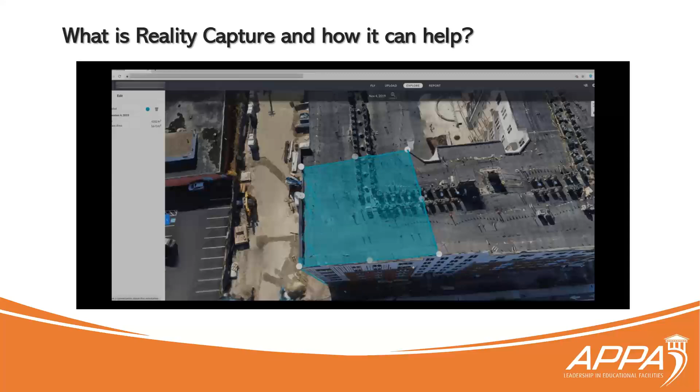So let's discover what reality capture is. Reality capture is a hardware and software solution that allows you to create 3D point cloud models or 3D meshes from laser scans and photographs, which translates to a virtual 3D model of your project or scope of work. Point clouds are made up of billions of 3D points that a LiDAR scanner captures, and 3D meshes are made from overlapping photos that a digital camera captures. After your model is created, you can virtually revisit your project anytime. Just think about the value that could bring to your design and construction teams.

We use this data for all types of analysis, for example, measuring distance, area and volume, floor flatness and levelness, wall, floor, pipe slope, surface elevations, and more.

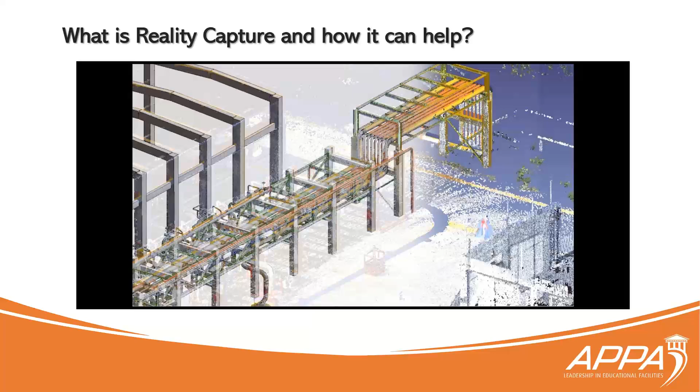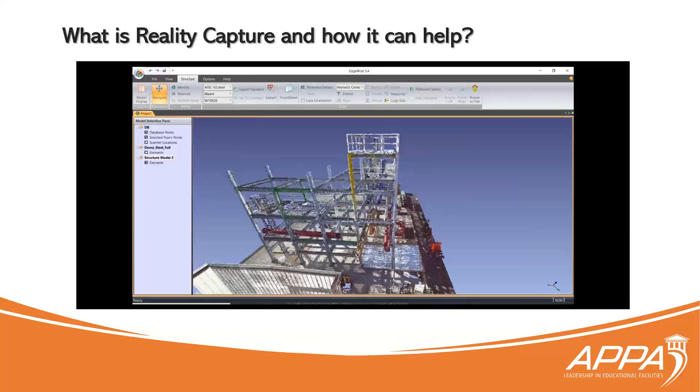You can also use this data for feature extraction, which is automatically or semi-automatically extracting usable 3D geometry or 2D lines from point cloud models to jumpstart your design. For example, you could extract walls, floors, duct, pipe, conduit, structural components, ground topographic surfaces, lane, curb, and rail lines, etc. Then consume that data in your design authoring tools.

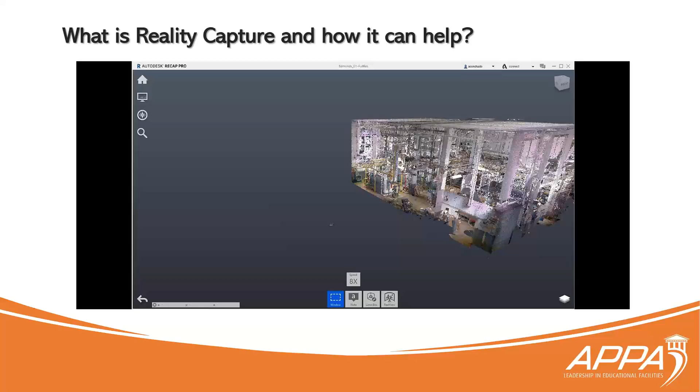These 3D models and meshes can also be linked into BIM, CAD, and GIS software, such as Revit, AutoCAD, Civil 3D, InfraWorks, Navisworks, Bentley applications, ArcGIS, and more, then used to generate highly accurate BIM and CAD as-built models. You can utilize this data for all phases of a project lifecycle, including existing conditions, concept design, design development, construction, handover, and commissioning.

So I want to review some examples of industry standard reality capture equipment, many of which we utilize here at Fleming. The first category we'll look at is static LiDAR terrestrial land-based scanners, meaning you initiate a scan, reposition the scanner, complete the scan, and so forth.

This category of scanners produce highly accurate and dense point cloud models by stitching together scans that can also be geolocated. There are a wide range of costs, starting at around $15,000 for economical scanners, upwards of costs of $100,000 for high quality scanners. They average 2 to 8 millimeter accuracy, depending on scanner models, settings, and overlap between scans, and could typically take 1 to 6 minutes per scan, depending on density, picture quality, and hardware you're using.

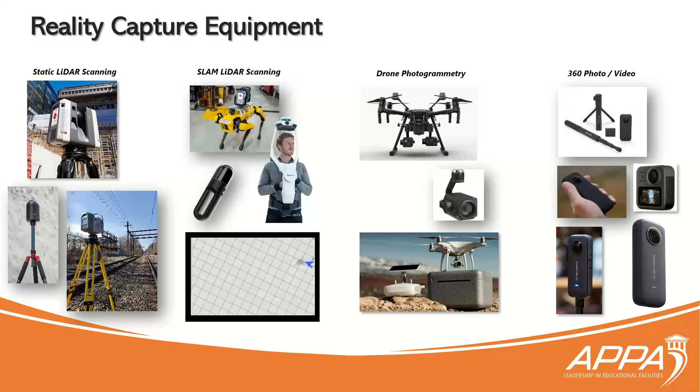They can be handheld, mounted on a pole, tripod, vehicle, helmet, drone, virtually anything. Cost average at about $350 to $1,000 for good high-quality cameras. They're also commonly used in action sports. It's a fast data capture process, photos take a split second to take. Depending on the software, you can automate or manually map photos and videos to plans, which can even be geolocated. We'll cover that integration to the project workflow later on.

So how is this technology changing the way we work? And how can this help you in the current and post-pandemic climate? Not just our industry, the entire world has experienced a massive shift to the cloud with the need for easy access to data anytime, anywhere, any device.

We're utilizing this technology for almost all aspects of design, using different applications to work and collaborate in various cloud platforms. Along with this shift, the AEC industry is experiencing a transition towards a common data environment, meaning regardless of the location, tool, or file format, design and construction teams collaborate on project data within the same unified platforms, using various applications, tools, and processes.

There's so much value with all stakeholders in a project being able to access and utilize the I in BIM, which is information that we're inputting into our designs. To summarize, there's endless value by utilizing reality capture and BIM workflows for your designs. We're using this technology for more comprehensive project capture to build smarter designs and solve challenges during design, not construction, which is resulting in a more coordinated and efficient design, construction, and turnover process.

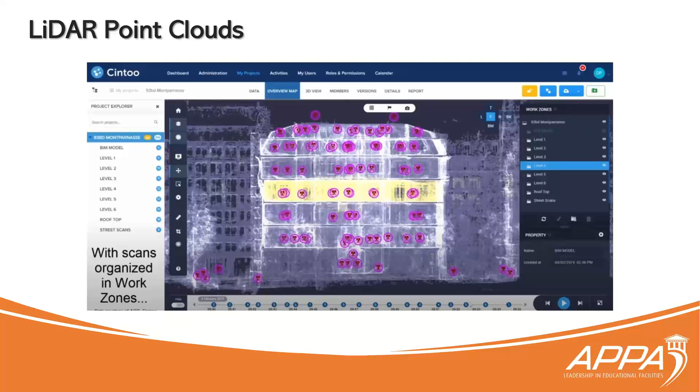You can organize your point cloud in work zones, which simply means grouping scans for quick and recurring access to specific areas. This is by level, which is typical, and you can quickly jump into each work zone from there. Here's an example of a point cloud organized into work zones via floor level and area.

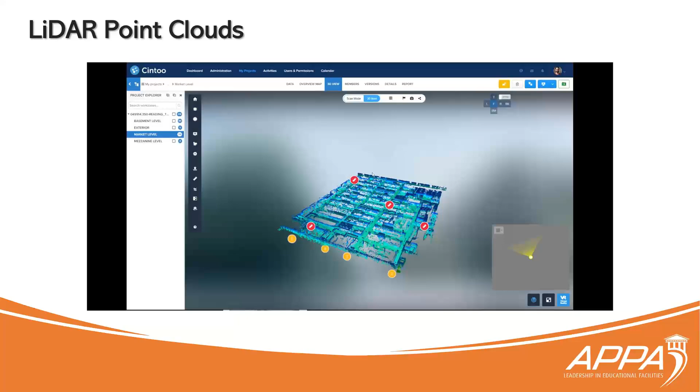Notice the notes and dimensions available. We can jump right into a crop view that someone had saved with certain settings set, and from here we can jump into a scan setup and switch the way points are displayed very easily.

We can switch from the surface view to a panoramic photo that was captured during the scan. You can also dimension and annotate in any display mode and save those dimensions.

You could easily create and save cropped areas of the point cloud, create annotations, dimensions, upload other supporting documents, and download point cloud models. You can upload photos, videos, PDFs, other images, etc.

Measuring is one of the most common tools used when interacting with reality capture data, and Cintoo has a really nice measurement tool where you can pin one side of your measurement and quickly measure anything off that object.

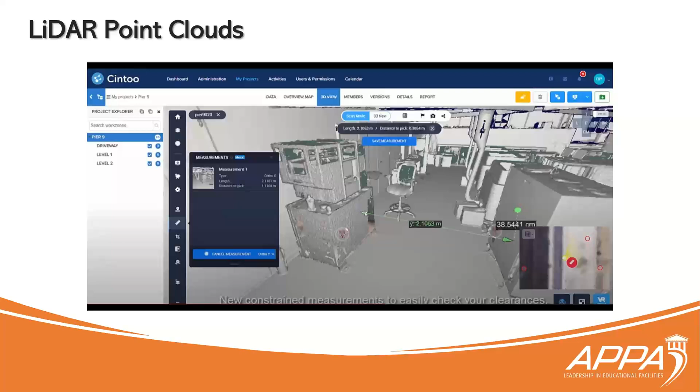Cintoo is built from a collaborative mindset, so all of these crops, annotations, markups, edits, and uploads that you make are saved and available to the entire project team. You can run visual analysis and BIM point cloud model comparisons to confirm accuracy.

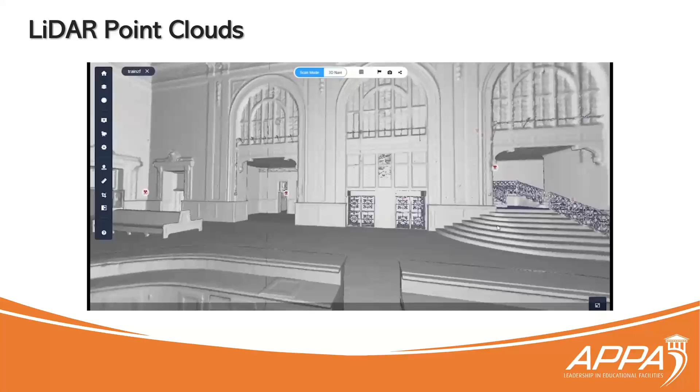There are other products and processes available to share reality capture data that we utilize as well. But Cintoo's been a great tool and process improvement for all stakeholders involved so far due to its user-friendly controls and ease of sharing and integration with other apps.

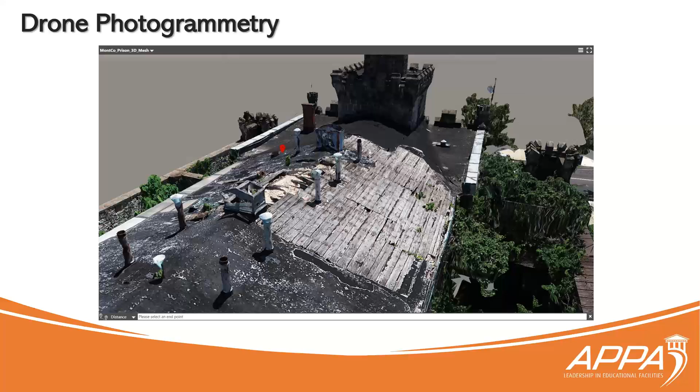Next up is photogrammetry, which could be the output from a drone or handheld camera. We're viewing a web-based solution, but this could also be utilized with installed software with more tools available for analyses and feature extractions. We can easily take measurements and notes with a solution like this.

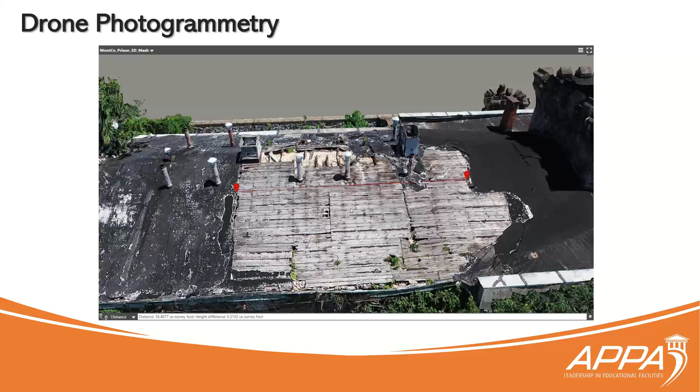In other apps, we could combine LiDAR data with these 3D meshes and also convert these 3D meshes to point cloud models to complete feature extractions, and also link these into various design authoring applications, very similar to LiDAR, for as-built modeling and more.

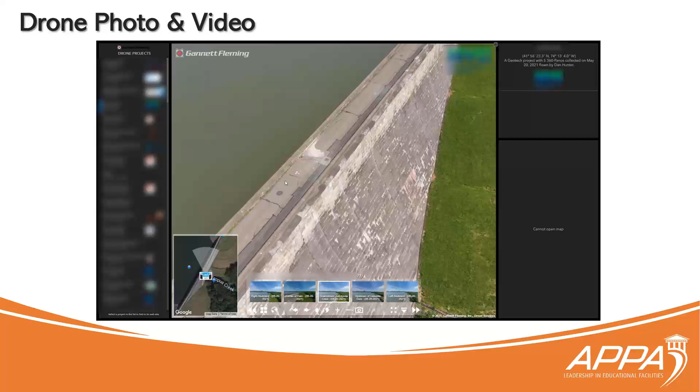Here's an example of a high-resolution 360-degree camera mounted on a drone. Just like sharing LiDAR and photogrammetry models, this data can be shared via secure web access in the cloud, with no software or hardware required.

These high-res cameras mounted on drones capture an enormous field of view and detail from hundreds of feet in the air. You can navigate the key plan in the lower left-hand corner, which tracks your viewing perspective, or by selecting photos in the lower ribbon.

Depending on the team's goals and objectives, we develop various deliverables with this drone and photo video data. We could integrate 360 photos and a sitemap viewer like we're seeing here. We could set up a video inspection with sitemaps.

Video and high-res photo inspections broken into zones or sections depending on what you're capturing, or all of the above and more. Being able to easily document a scope of work with this level of detail and ease of use, then share it with all project stakeholders in this capacity, just like LiDAR and photogrammetry, has been invaluable to our project teams and is enhancing the quality of our projects and designs.

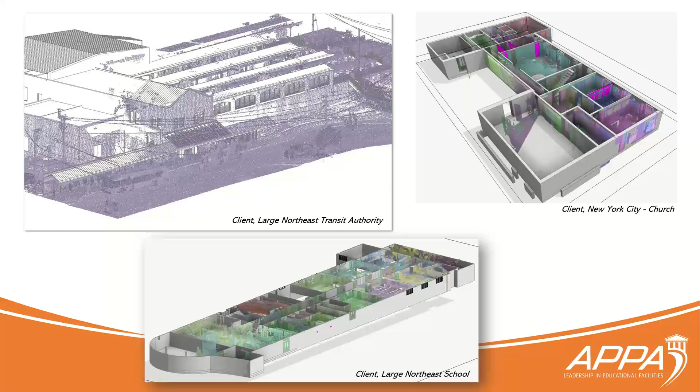We need skilled, motivated subject matter experts to take ownership, drive change within your organization, evaluate new enhancements and inventive solutions, and be those experts other teams can rely on for projects and proposals. We need processes to effectively train various level employees on the myriad of technologies available, how it can help their teams, and what they can do with this technology.

And finally, continue to develop new workflows, processes, and standards to enhance efficient, effective use of reality capture on projects. And now we get to technology. There are so many hardware and software solutions that we utilize currently, and way more that exist.

It's not just the reality capture hardware. It's the high-end PCs processing this data, servers and external drives storing data, using cloud services to store and share data various ways, using different software solutions to consume data effectively and process data various ways depending on how you're utilizing reality capture.

Now that we have a good understanding of what reality capture is, I'm going to hand this off to Bill, who's going to review how it's applied to all phases of design and construction.

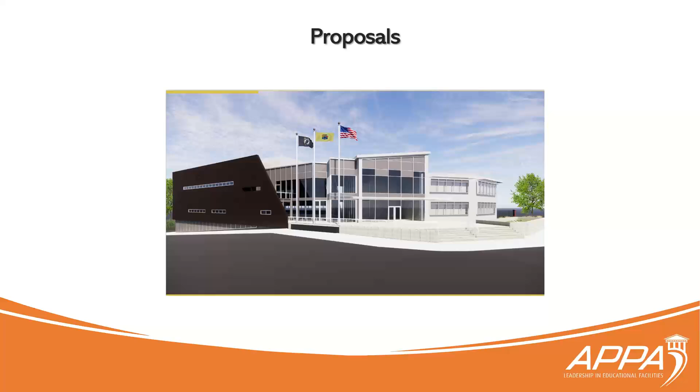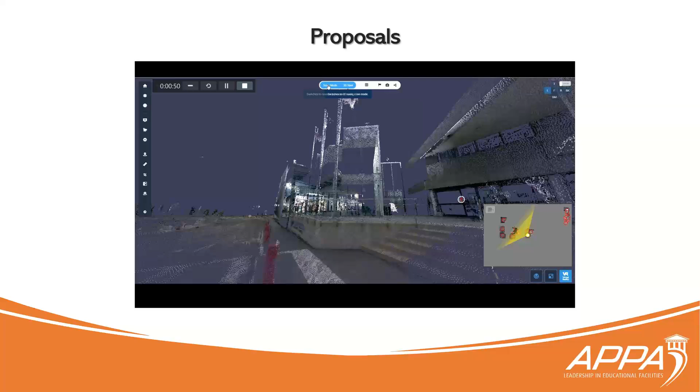These scans help get an accurate picture of the tie-in points and dimensions of the existing structure. We traveled around the building to capture this information, noting that during a proposal phase, planning was important. The planning of those scans leveraged the time spent and the information necessary for that. You can denote and change the model features to help capture and understand the elements that were scanned and see within that point cloud.

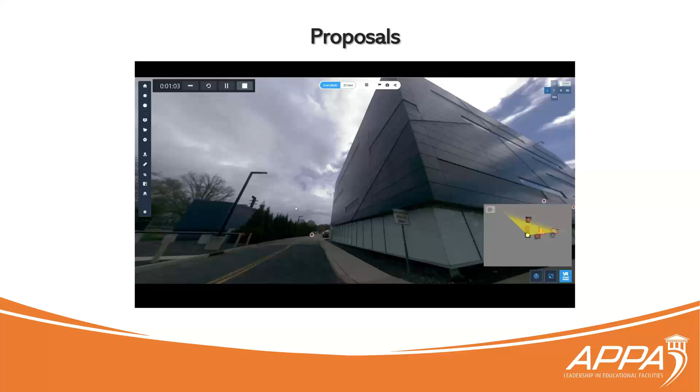You'll see the picture-in-picture view in the bottom right shows the scans. These are large and widely spaced around, and that's on purpose because at a proposal phase you weigh what information you need, not to shortchange it, but the amount of time spent, that project's not won. So you have to weigh that with the decision process.

To the left there, that's the demolished part, and it's important that we capture that information. You'll see we jump between scans because this building was constructed in two phases, where the newer construction to the right was about 15 years later. However, not all utilities were independent.

There was only one main gas service. It came in at the back location of the original construction and divided into 3 pieces. One went off to an adjacent structure, one went to the original construction, and the third traveled through the original construction and ultimately to the construction that was 15 years later. The problem is we were demolishing the original construction, and this LiDAR helped us get accurate information of that gas line and its path through the structure to make sure that handshake was as seamless as possible.

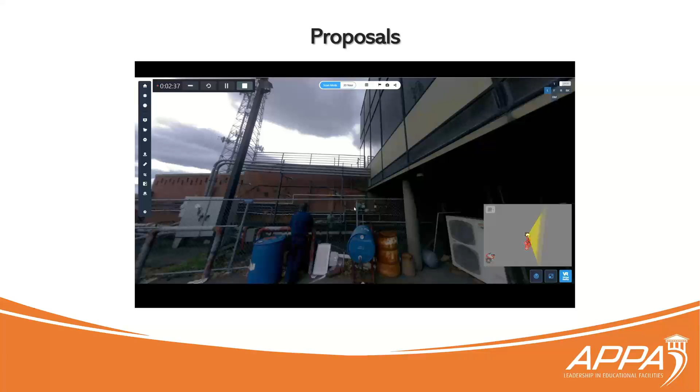So going forward, we'll see the other proposals, pictures, and renderings that were done with this project.

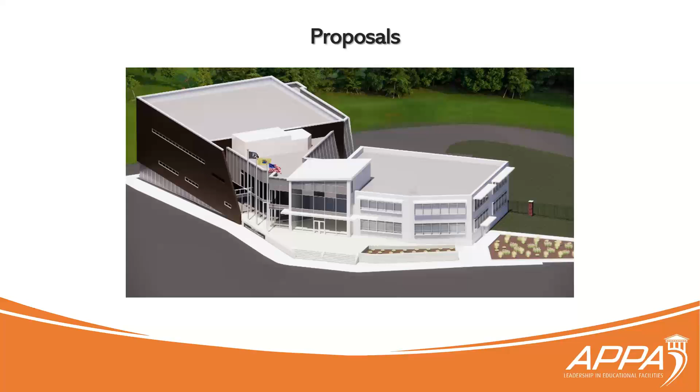Here is a rendering, this is the front view. Mid-picture is that handshake of the existing structure, which was phase 2 of construction, about 15 years after the original construction that's going to be demolished. The next rendering is a slightly different perspective. Now we're going around to this, which is all existing to remain. And finally, to the last.

So let's move into design. Within design, who benefits most from these technologies and their implementation? From our perspective, it's the design team and the client. For design, it captures more accurate survey information with fewer people and in less time. The information helps construct a virtual representation of the project for continued assessment well after the project team leaves the site. As for items that are designed, we can also do virtual clash detection and interference checks in 3-dimensional space before construction occurs.

Now for the client, it also limits disruption. It limits the personnel on site and visually helps relay design approach and intent. If a new project personnel on the client side is added, they can get up to speed quickly because they can understand the site conditions without physically walking and visiting it again together. It enhances facilities personnel interaction and engagement to identify exact tie-ins with a visual support representation to ensure all project team members are aligned.

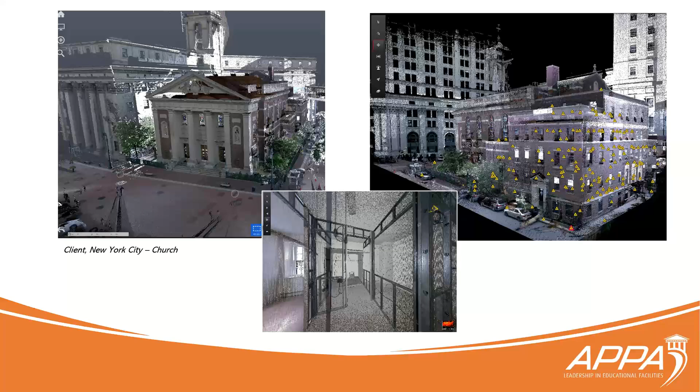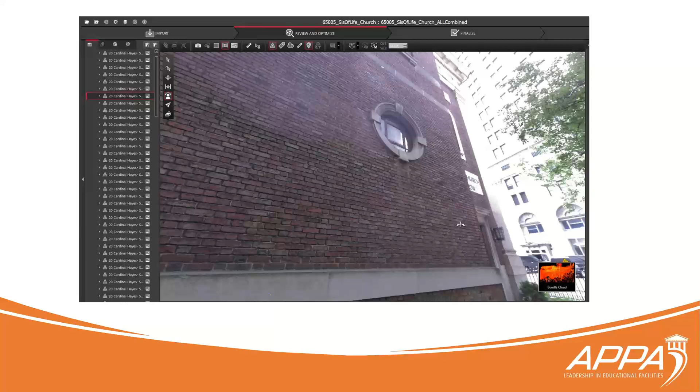So let's navigate the scan. We'll first make all scan locations visible. By utilizing the 360-degree image capturing during the scan, right away we see drainage along the building face that's resulted in efflorescence of minerals on the surface of the brick. This architectural team scanned and surveyed the facility, then linked the point cloud into Revit, and from there they modeled the entire structure, which included the church and the attached rectory.

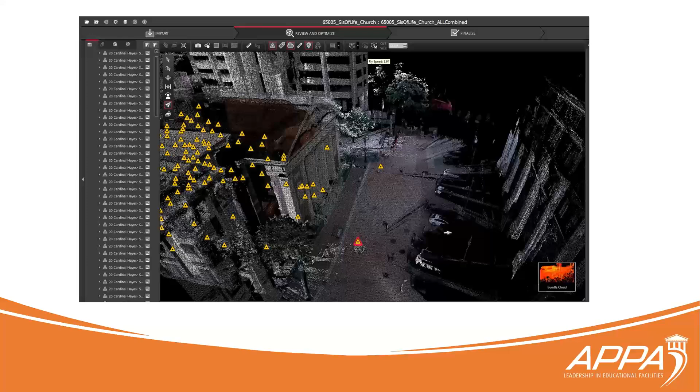The scope of this project involved modifications to the rectory, with an adjoining space that could house nearly 20 people and provide offices for each member of the mission. To do this, the facility needed to add an elevator and new ramp to comply with ADA. Lastly, envelope items were addressed, which included repointing the existing facades.

Regardless of the software you're using, icons for each scan location are shown, allowing you to easily navigate through the point cloud while giving proper perspective of where the scan occurred.

Sorry, my light went off.

This video will navigate from the large congregation areas, as you see here, into the back of house and support areas, to understand the complexity of this facility, where the upper floors were in various stages of demolition and reconstruction.

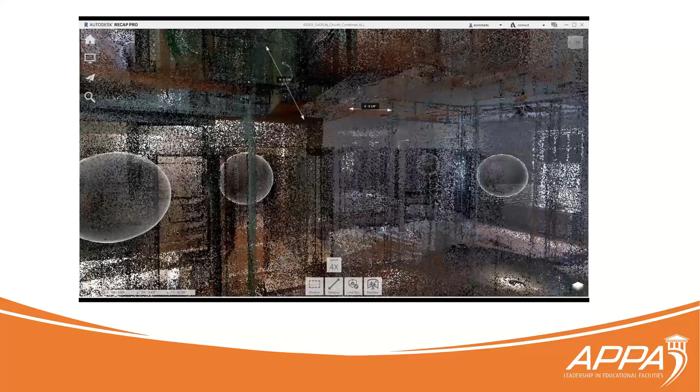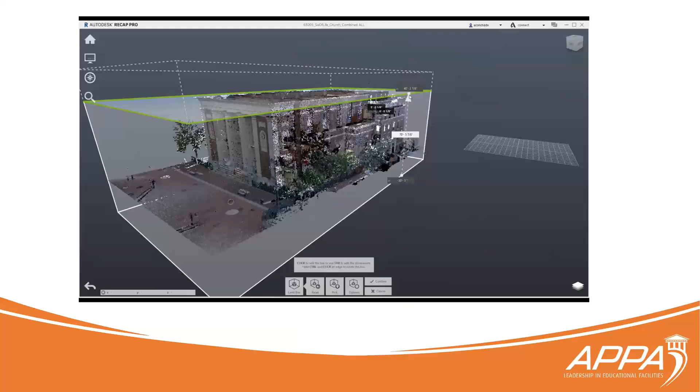Now, within the back of house areas, we're faced with small compact rooms. Here, you'll see the density of those scans shown by all the dots. We had to get within each space to allow the line of sight and get appropriate information for the LiDAR scanning.

Now, this project, our client was a congregational staff that expressed concern about visualizing the whole picture. So to help navigate it, we showed the digital twin of the building. We were able to step outside the building and start to slice it up.

We showed the levels, jumped to a level, and explained the process and the work happening within each space. Further detailing of site dimensions and annotation, as Tony pointed out earlier, can be put within the model and shared to help that collaborative discussion that occurs. So stepping further outside the building, you see all the information that was captured.

So here's another example. This project was a boiler replacement in a central mechanical room. However, we had to capture more information than just that room. Here's an unedited scan, and the reason I'm saying unedited, you'll see off to the side some of those points that are outside the building envelope.

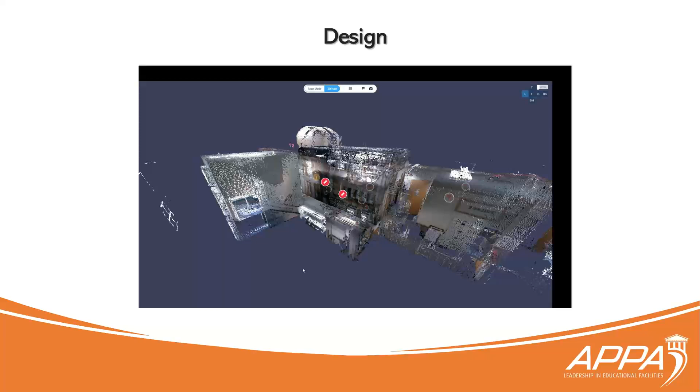Now, this is a line of sight technology, and with that, if you have a window or a transparent surface, it will go through, which can be edited later, but you'll see points outside your envelope. This scan will navigate through all of the spaces, and off to the side are those points captured outside. Now we navigate through each space, and what was captured here is to get a background. The reason to get the background outside of just the space involved is because code requires carbon monoxide detectors.

And this client didn't have that background. To do this by hand would have taken an exhaustive effort, where we're able to do it with scans. We walk through the space, appropriately space the scanner to get the accurate information of the outline and necessary background at play, to get all the information in a streamlined and effective process.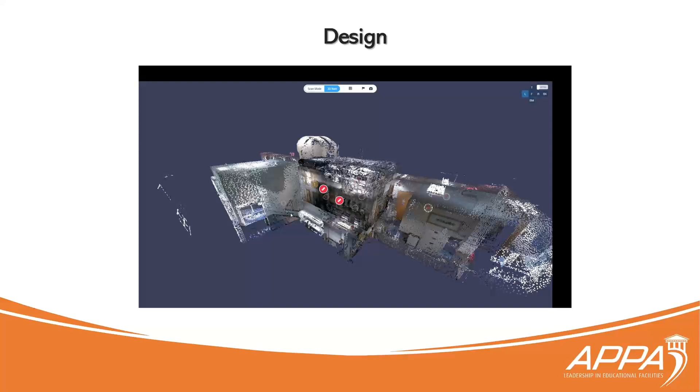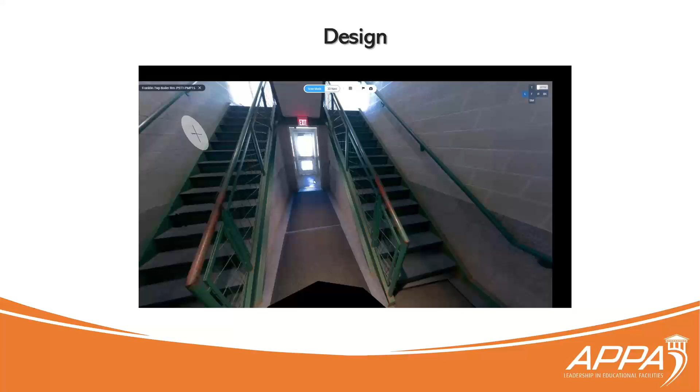So from there, the end product, we navigate into the scan, and here's in that hallway. Now you'll see that window was showing where points were exterior to the building. Again, with the unedited model.

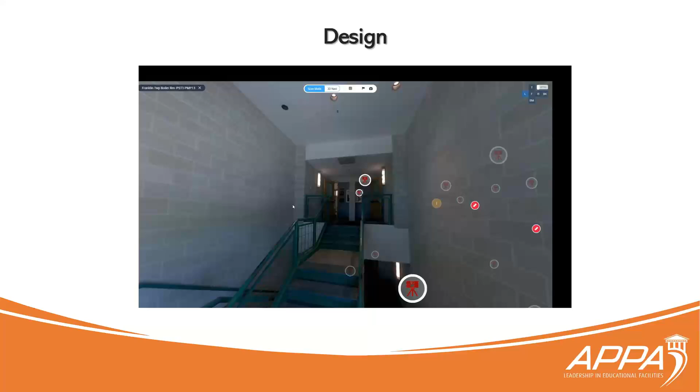You can jump point to point. Here, you'll see the orbs with the camera icon, and as we walk through, you'll see the density changes. For the architectural, it wasn't a higher density, but when we jump into the mechanical room, it's a much tighter density.

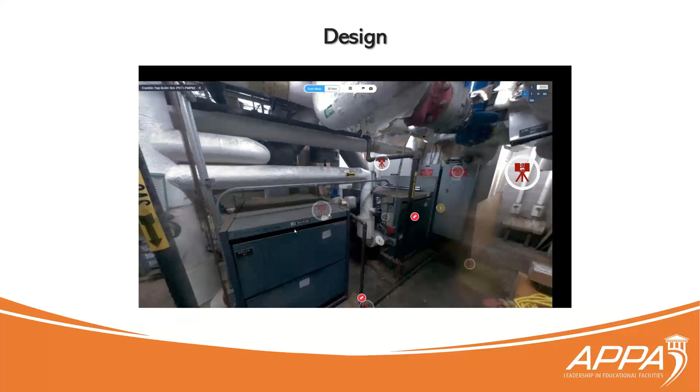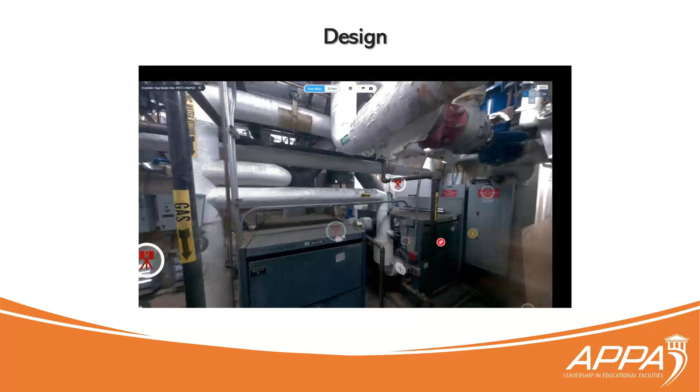Now, this is a congested space. Scans were taken at different elevations, high and low, around equipment to make sure that we have the line of sight information necessary to help facilitate design.

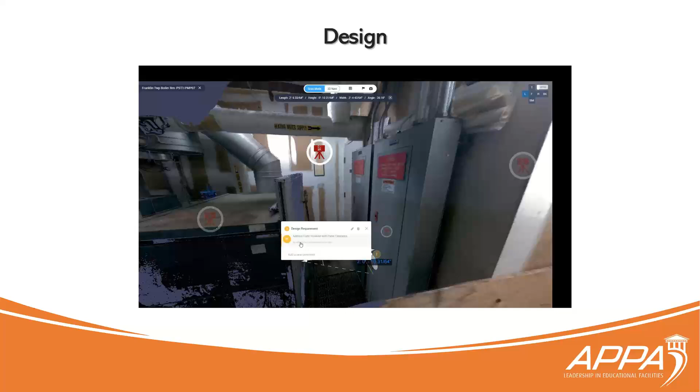And with that design, we share information amongst the design team. Here, a dimension was noted, and within that dimension, there were annotations. The annotations informing them that there's currently a code violation: improve and increase the clearance to the electrical panel.

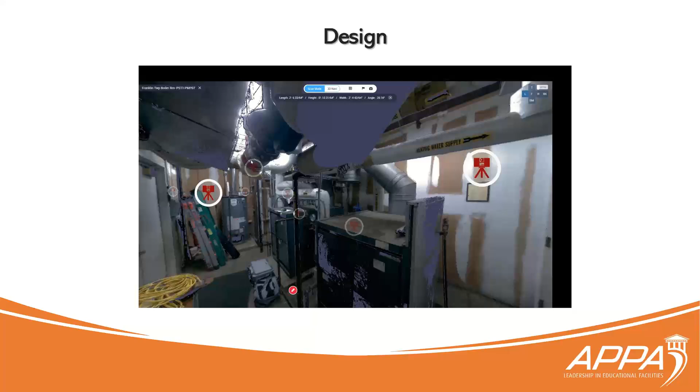This is clear information that is shared amongst the project team to make sure those design elements and necessary things are shared amongst the people that were on site, as well as the other support people that are helping with the project.

Again, the scans here are high, above the pipe rack, to get all that information that is necessary, and as well, jumping down low, getting under that piping for the line of sight, and behind equipment, and even between equipment, with this latest scan between both boilers.

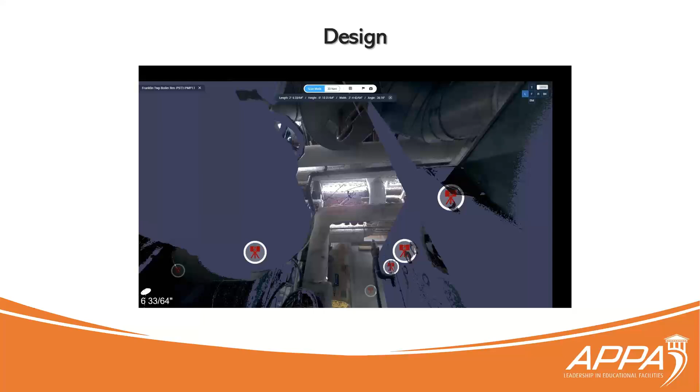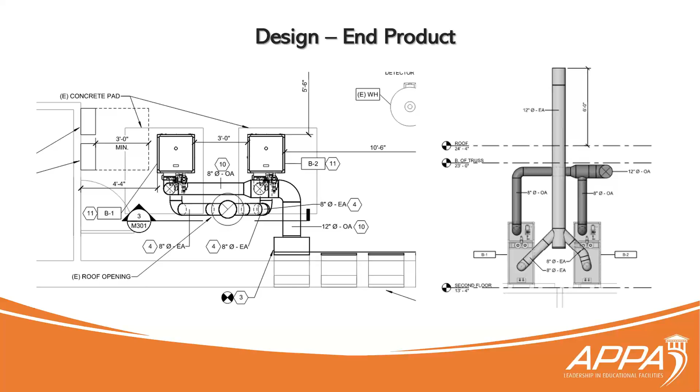So we'll move from here into what the design end product looked like. From that 3D LiDAR scan and information, we developed the model and all the information. We also can then do our Revit work on top of that, removing the equipment that is to be removed, and doing a 3D representation of all the information that then is going back into the space, as well as the equipment and associated piping and all the pertinent information.

So taking it from design into bidding, why do you do a walkthrough? We see it as limiting risk. Contractor walkthroughs allow them to see the site conditions, plan their approach to the projects, and understand the obstacles. In short, they can formulate their thoughts.

But in the current stage, how are these problematic? They're scheduling, scheduling with project managers, facility personnel, users, contractors, etc. But even after it's scheduled, there's also logistics with that site walk. You're managing a large group of people.

And finally, when bidding occurs, you want to make sure there's no competitive advantage. During a normal site walk, there is talk, there's chatter, and potentially a question is asked and may be answered where it wasn't supposed to be, and now a contractor has an advantage. By doing it virtually, everyone is in the same room, can walk through the same information, and questions can be clear, concise, and everyone can be informed of the answers.

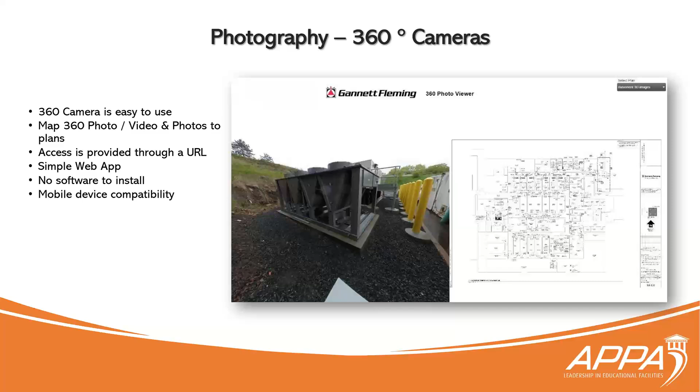So with the 360 camera, here's one example. It's a split screen where the picture's on the left and the plan is on the right. This shows the location where each picture was taken and the associated picture that they can pan and zoom and navigate through. The next example is a 360 with a similar picture-in-picture, just in a smaller corner.

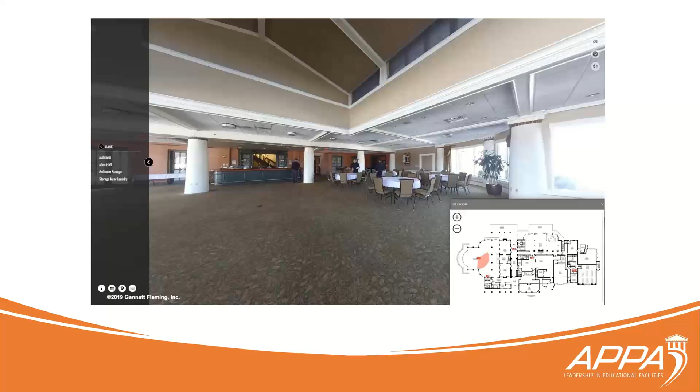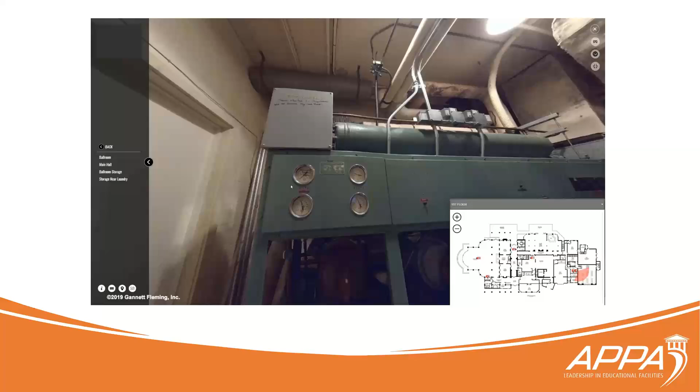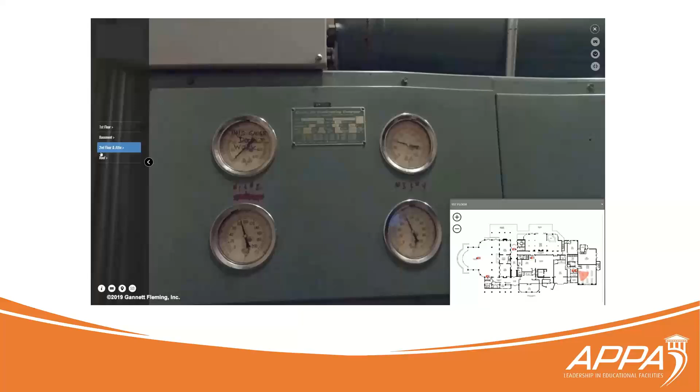That shows where the picture is done, but we also included the perspective, where our line of sight view is. The key plan allows you to jump point to point, and this entire process was to mimic that contractor walkthrough - the old traditional approach of gathering a large group of contractors with clipboards in hand, walking through your site, but without the physical site presence and the logistics.

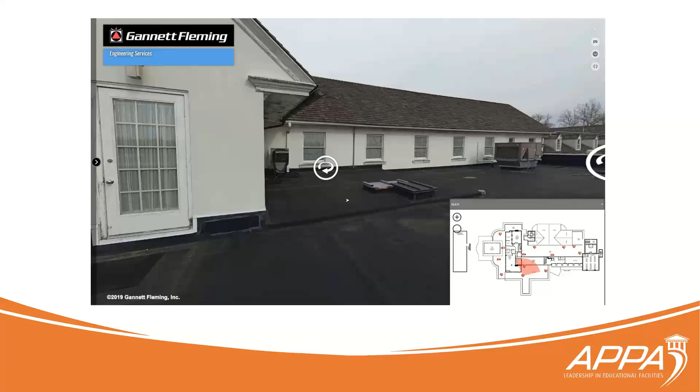Not only did the solution come from needing to support virtual walkthroughs, it came from the need to more effectively share this data with the project team.

So in this video, you'll see the key plan and icons, and we can jump to the different staging points as well as between different levels. Initially, we're on the ground floor, and through the side drop-down menu, we jumped up to the roof.

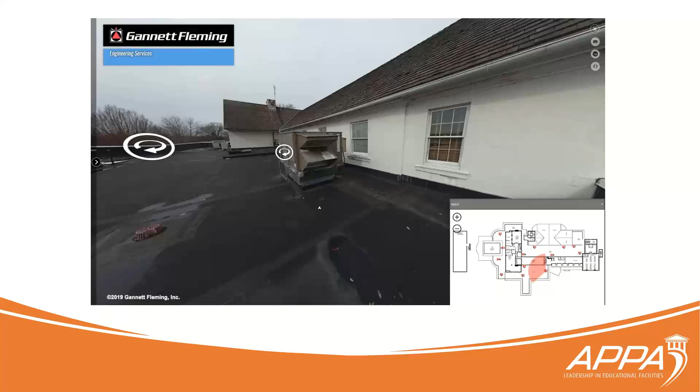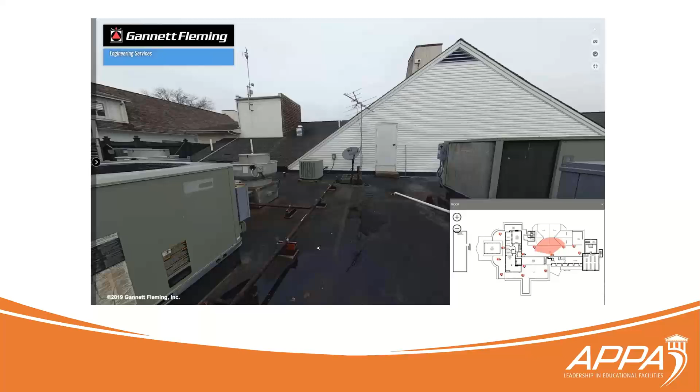All these examples are going to show you today is the project team - their survey was very planned out. It was planned out to avoid blind spots, allowing full view of site elements and equipment. Regardless of technology, the items that we're showing you here include line of sight information. The locations are selected, and for this, they correlate to the plan in the picture to give that perspective.

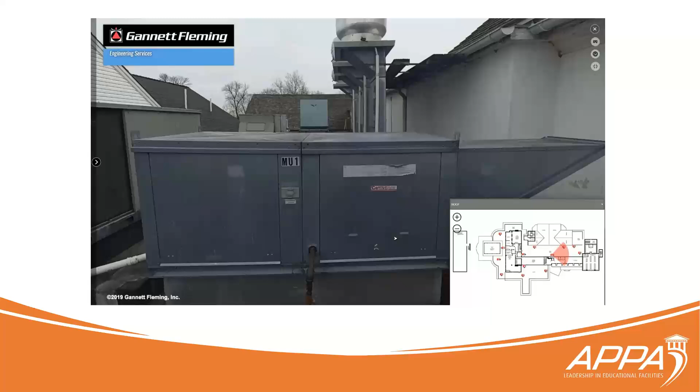This allowed the contractors and their subcontractors to understand the site in parallel with the contract documents to aid in getting informed bids. As I noted earlier, planning is very important.

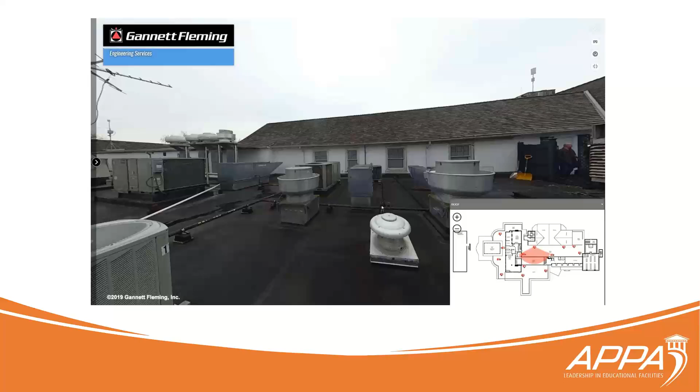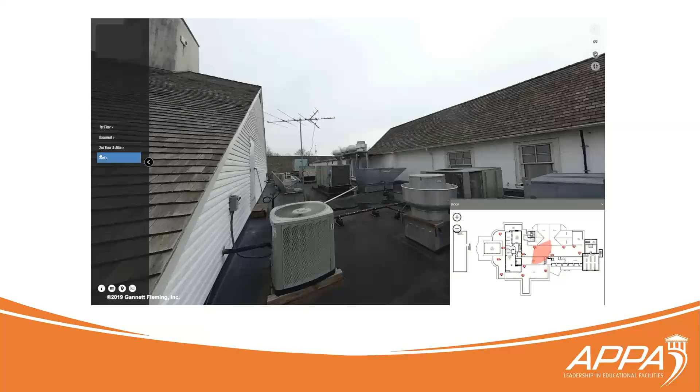So we'll continue to navigate level by level, panning and zooming between the pictures. You can move to the next space and the picture can also be adjusted in size.

Here in an electrical space, the pictures were taken in close proximity. You can pan and zoom with the pictures to get the necessary breaker information, connected panel schedule, as well as all information and obstructions they may see in this tight space.

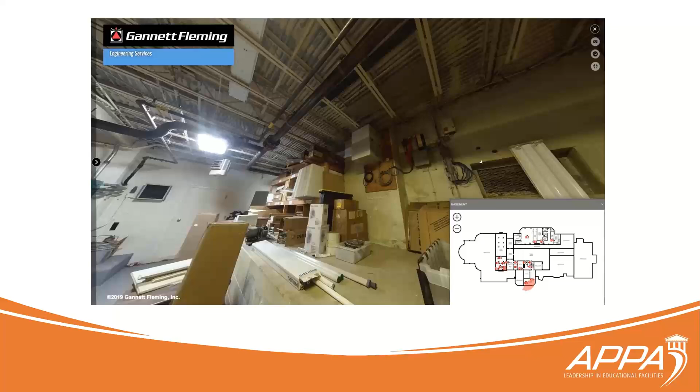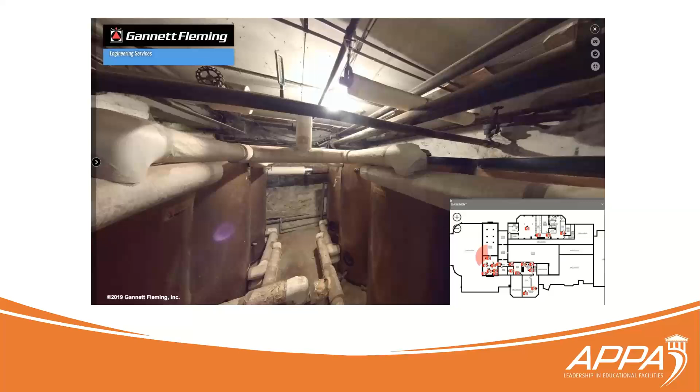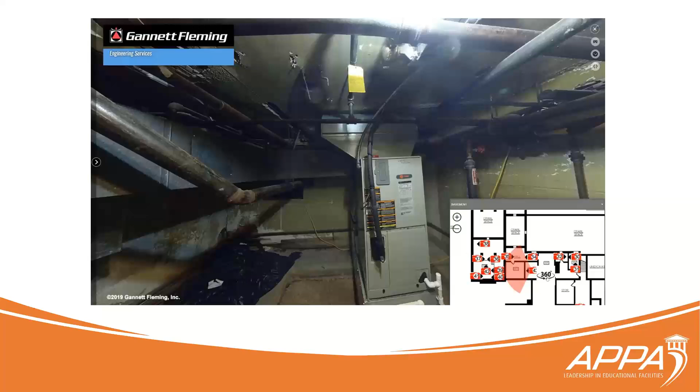You'll see the electrical gear is almost up to the structure, making it very difficult, and the mechanical even tighter. Here in a crawl space, all that information was captured and relayed to the contractor, where a 2D representation, even with sections and isometric, is sometimes difficult to understand exactly what the site conditions are. And this visual representation makes that picture very clear to the contractors.

So from here, we're going to go to true reality capture. This example is our BLK 360 LiDAR scanner with integrated 360-degree photographs, and this was used to develop a colorized point cloud.

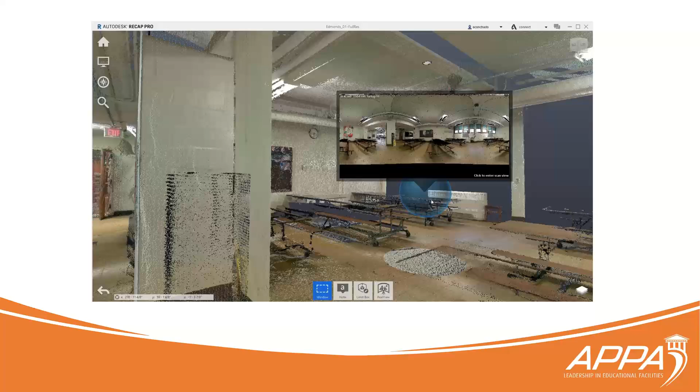Within the reality capture, we can also alter the display. You'll see the point cloud can be changed from the picture to other perspectives to understand and see elements within that. Further annotation and dimensions are included within this model to help relay that information, make it very clear to the project team, and this was also shared with contractors.

This example was a link shared to contractors that was time-based. It expired after bidding. And as Tony mentioned, that can be with or without a time, and it can be shared openly amongst all users.

So we go to construction. Now, construction includes kickoff, progress, inspections, punch list closeout, and many other milestones. But we look to apply this technology, again, on a case-by-case basis, where it's important and necessary to capture progress, or maybe even relevant information of things that need to be addressed.

So going to the next slide, this information is a scan that was done above a ceiling cavity. During construction, initial inspection reports noted deficiencies within the components installed above the ceiling. However, as it progressed and when final inspection came, all the ceiling tiles were installed, which makes it very difficult to verify that information. Through the use of LiDAR scan in this case, we're able to see the above ceiling information.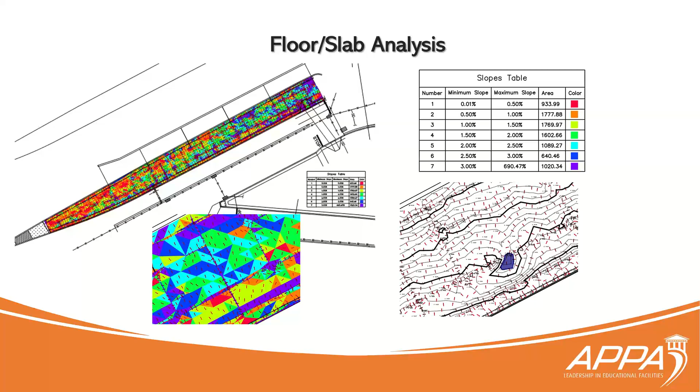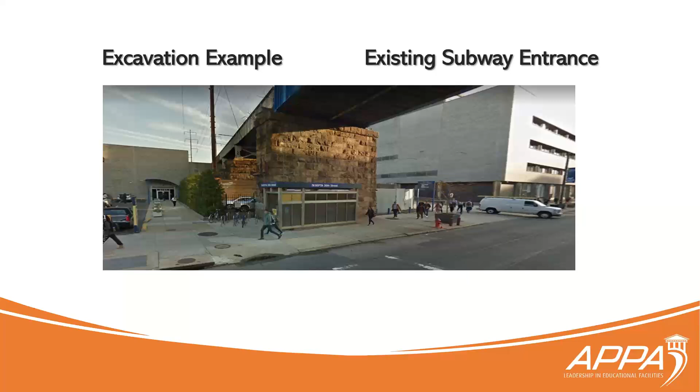It can also be used during construction where existing information may not have been clear. Here we're working in Philadelphia, an established city, where there's a train center that had a stair. We're adding an elevator to make it ADA accessible, but all that information was from structures that were from the 1800s, very old. So here was ultimately what the vision was: to change that stair as well as build an elevator on the end to make it accessible to all users, to help facilitate use of the subway system.

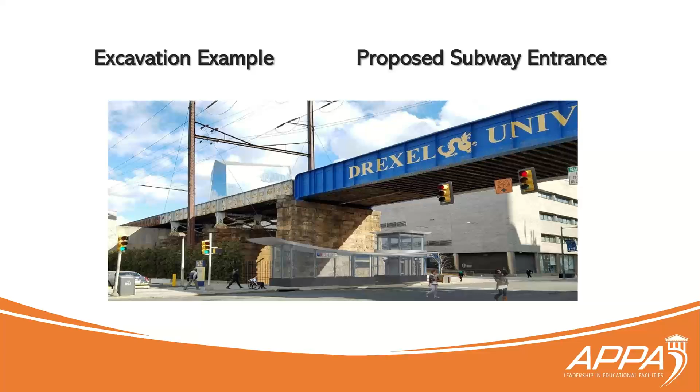Even further, cutting the section to give that stair representation as well as the elevator. And it's important to note, we had to increase that excavation in an established city with information that may be documented, but is it accurate?

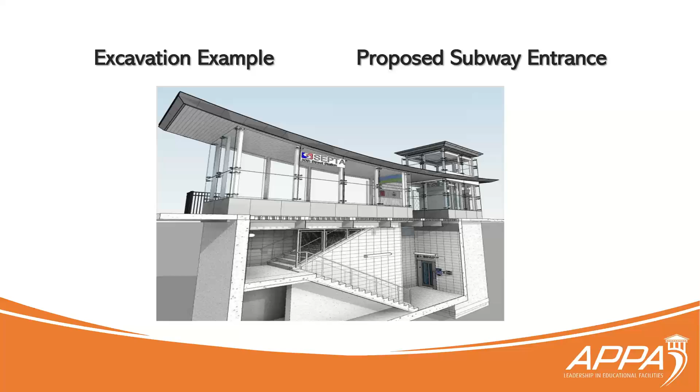Going to the utilities, these are 1800s part of the city, but these were 1930s that we had information back to. It shows the stair and all the crossing utilities within that area.

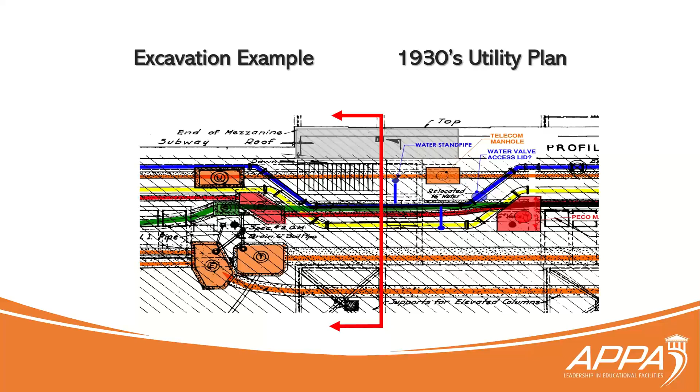Now, surveys can be performed within line of sight. There is some ground penetrating radar, but some of that information is hard to see and capture until it is opened up. Excavation was done very carefully with vacuum excavation.

And here we're going to see these utilities straddling that stair. You'll see on top and on bottom all of the items that we had to preserve and maintain, with that elevator also going with additional excavation.

So going forward, yes, the excavation was done very carefully with a vacuum. Therefore, we weren't bringing in jackhammers and all the necessary things to disturb those utilities, but made sure that we removed and excavated in a properly planned process to see that we're not disrupting what's there.

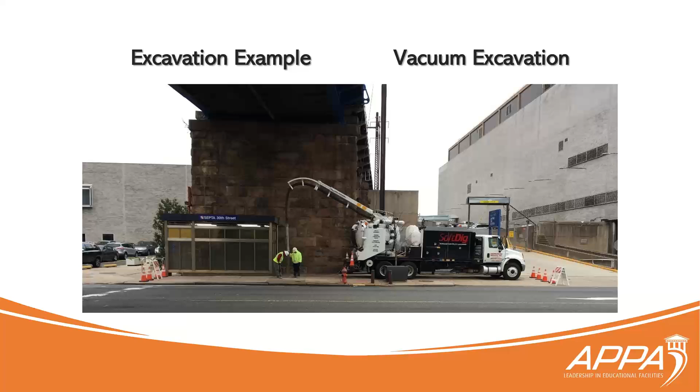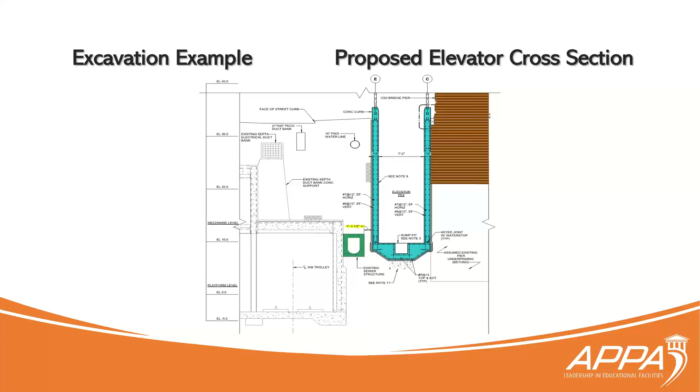So when we come down, this ultimately was the goal: to do the new elevator shaft and still straddle all those utilities that were within that additional excavation.

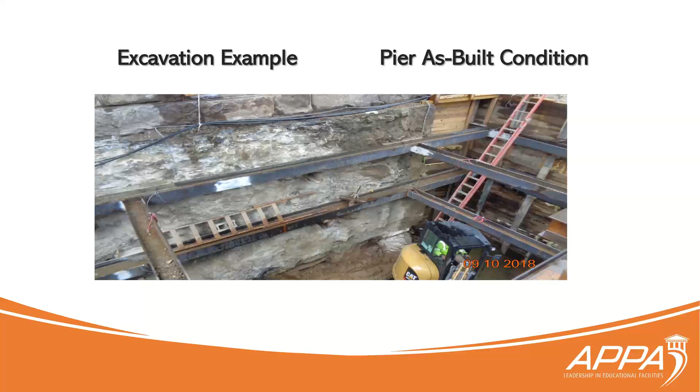However, when we come to it, these are some of the conditions that we're seeing. Some of the utilities were shifted over, as well as underpinning of the building extended further and even into our excavation.

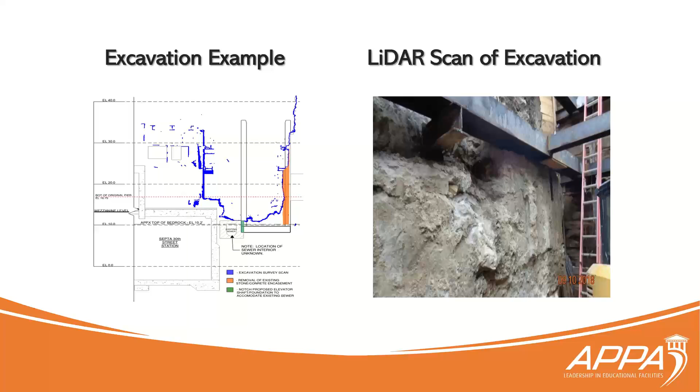So when it was excavated, we brought in the LiDAR scan. This gave us accurate information within millimeter accuracy of all those pieces that were captured, to clearly denote to the contractor and the project team what was necessary to facilitate and slightly shift elements to complete the project.

So ultimately, in the excavation example, we were able to still get that same representation, including the elevator, and help streamline the construction activities through the use of LiDAR scanning to get all the relevant information to help the project team stay on schedule and be agile to respond to site conditions.

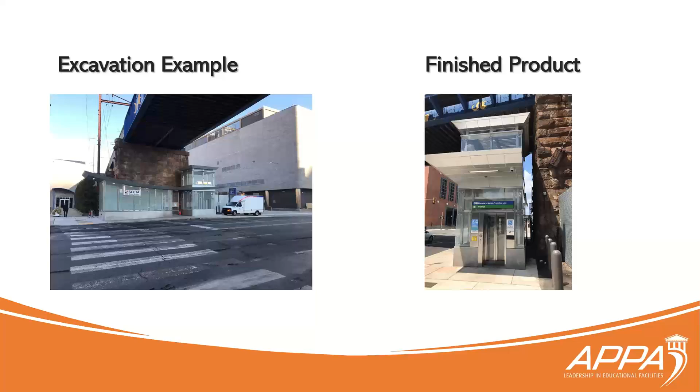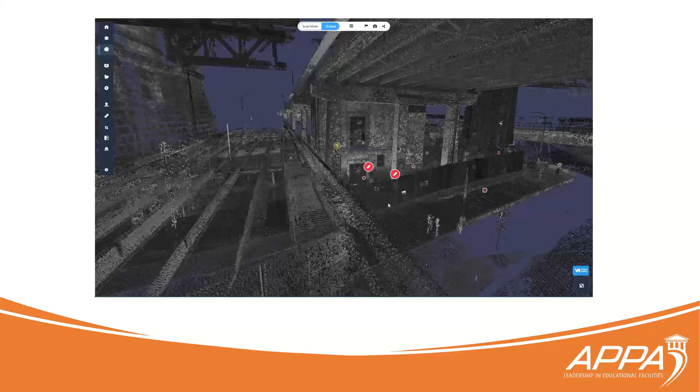So to summarize, through 360-degree photographs or reality capture, or both, it helps promote good health, increase safety, and improves participant welfare by limiting exposure of large groups of people. This has been applied to help support COVID-19 resiliency and continue the recovery efforts while maintaining business continuity for our clients.

They can be used and shared externally, depending on the application, without the need of specialized software. We use Cintoo, as Tony mentioned, and while we have licenses and capability, we can share that link out in a read or read-write application to help maintain that continuity and collaboration.

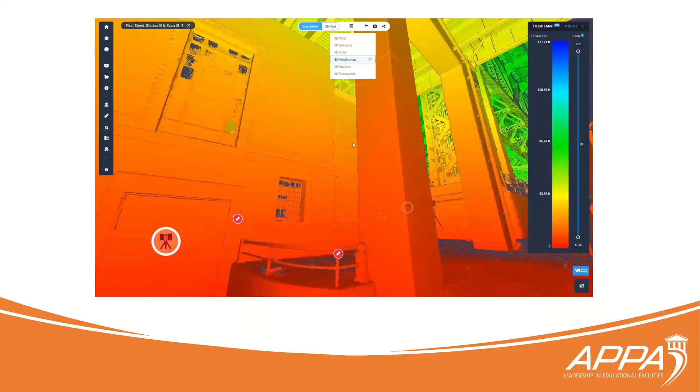And both technologies, 360-degree photographs and reality capture, allow team members to interactively navigate that 360-degree visual twin model to assess the scope of work and increase design accuracy as well as collaboration.